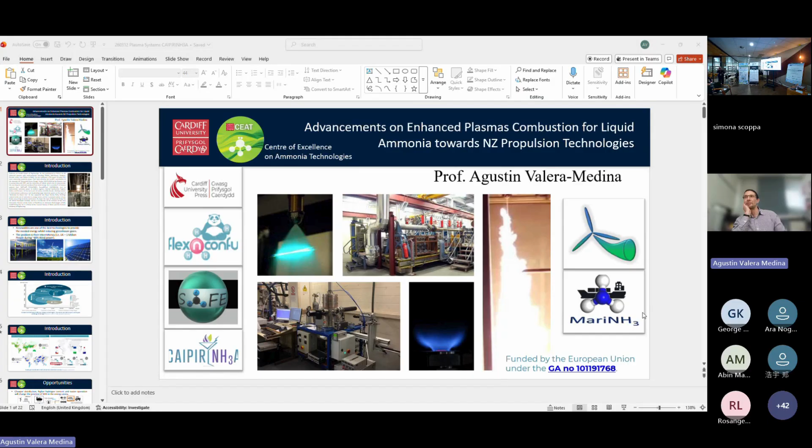Excellent. Okay, so again, thrilled to see that there have been lots of questions about what we have been doing, and I can expand on many of the points raised by Konstantinos, particularly on the technicalities of using combustion. So this is a program called Caipirinha, as mentioned by him, funded by the European Union. The whole rationale behind it is that we can use ammonia directly for many different applications.

So this is just a brief introduction for those that like reading - this is some of my CV. But the reason for it is, if you don't like it, you can still listen to the story on how we came across the use of ammonia.

This goes back 14 years ago when one day before Christmas, Siemens showed up and said, we want to burn ammonia. We didn't understand what they wanted at the time, and I decided to take the challenge. Why not? I wanted to find something new, so I gave it a go with ammonia.

We thought at the beginning it was just a simple project, but eventually we found out there were many things going on, particularly in Japan, where things were happening at industrial scale. People were doing very interesting research, and eventually we managed to get on the train and develop many different applications.

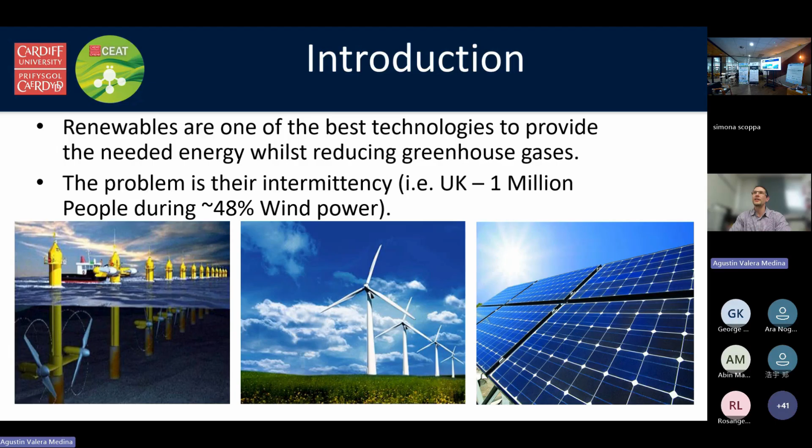In the case of ammonia, for example, it's been around 100 years that we have been using it for fertilizing applications, since the beginning of last century when it became industrialized, eventually boosting a third of the population worldwide. That's one of the main reasons why ammonia presents a very interesting case when it comes to certain applications.

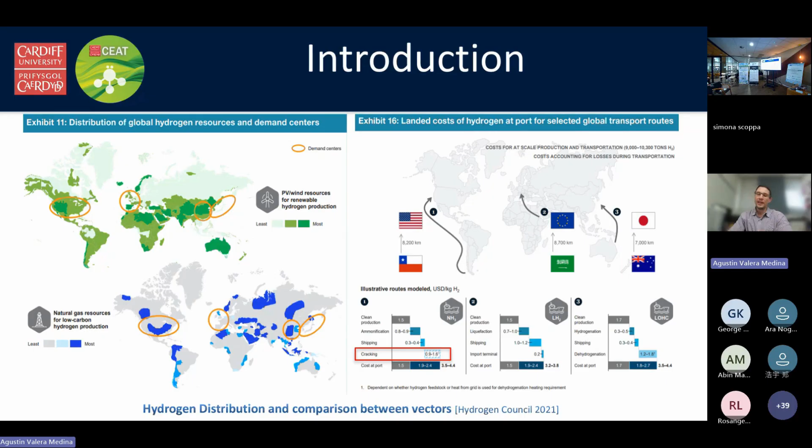Therefore, this raises the question: can we burn ammonia efficiently and directly into combustion systems? This is work we've been doing in collaboration with many other universities—Newcastle, Nottingham, Bath—to evaluate where we see this ammonia stream going.

We know there will be many scenarios where hydrogen will be king. For example, when talking about city deployments, small and short distance distribution, and immediate utilization, hydrogen will rule out over other molecules.

However, when it comes to long distance, and going back to isolated locations, we see ammonia as the best option. That comes as marine propulsion potentially—as I'll raise now in one of the questions brought up to the chat—and obviously rural applications in disconnected locations.

For example, here in the UK and spread across Europe, there are many farms or small communities that still rely on propane or other chemicals because connectivity via electric grids or gas networks is impossible. It's simply too expensive, so they've relied on these fuels for decades, and that's not going to change in the short term.

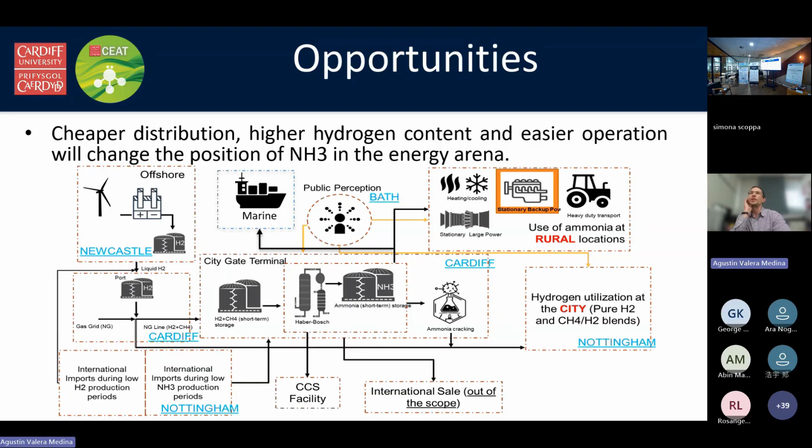So making ammonia for these particular situations is a very good option. One of the big problems we face is how to burn ammonia, and we have different alternatives.

Among all the different molecules here, ammonia's ignition energy is a few hundred times higher than hydrogen's. Similarly, its laminar burning velocity is a few hundred times lower than hydrogen's, making it very difficult to burn when it comes to direct injection.

So either you go with a doping agent like hydrogen, obtained via partial cracking of the ammonia, or you mix it with natural gas, providing a transition from natural gas systems, propane, as I'll show you later, or even other alcohols or fossil-based liquids like gasoline or diesel.

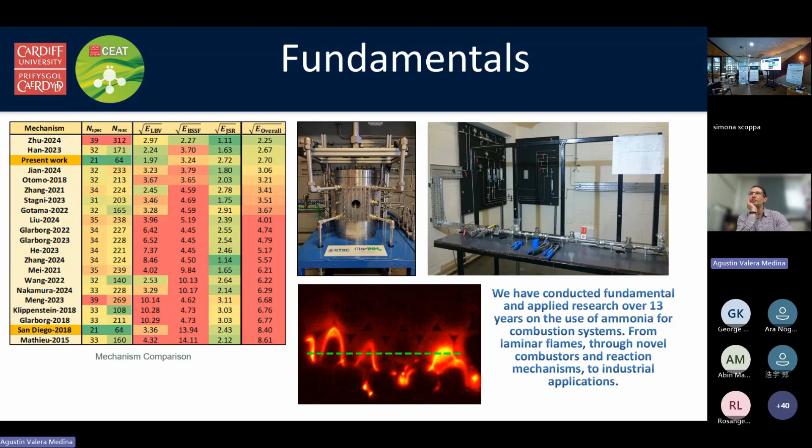Well, a few years ago, around 2017-2018, there were a few documents where universities in Germany started looking into the use of plasmas for the combustion of hydrogen. And it was interesting because, going back to Konstantinos's point, one of the things plasmas tend to do is create radicals. So if you have these radicals ready to react, once you get to the burning zone, they start mixing with the oxygen immediately, reducing the reaction time. Similarly, they produce radicals that are more strategic in recombining with oxygen to produce the final molecule—in this case water when analyzing hydrogen—instead of producing nitrogen oxides. That spurred imagination and eventually led some groups at Georgia Tech in the US to characterize the first ammonia plasma system.

It was very interesting because once they started using it, they found that stability improved, the flame got better, and the emissions profiles in terms of nitrogen oxides from ammonia combustion went down drastically.

As part of that program, we started working with our partners in Birmingham and Oxford, delivering some analysis via numerical modeling. One of the things we found was that depending on the amount of energy put into the plasma, and the concentration between the air and fuel mixture, that profile would change drastically. So there were many questions still to be answered, and we decided to carry on with our program.

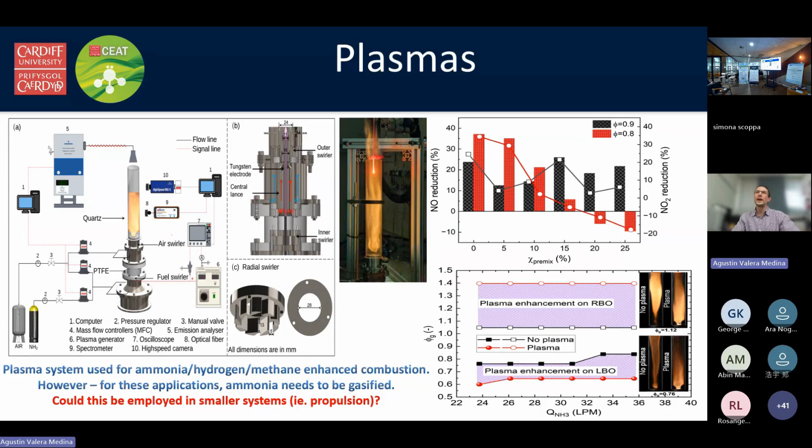So we decided to join Konstantinos's proposal and thought, okay, this looks very good, let's give it a go. But then one of the big questions was: okay, we can bring plasmas—people have already done it with gaseous injection—but what would happen if we decide to go with liquid, to prepare it as one of those concepts for marine and aerospace applications?

As part of that, some of the ongoing studies we included analyze what happens when ammonia is injected, and depending on that pressure—going back to the pressure—if the pressure in the atmosphere you're injecting into is not high enough, you might have flashing conditions. So you have a spray that eventually vaporizes, but because it's cold enough and reaches a balance point between liquid and vapor, it will start producing liquid again.

So you end up with liquid droplets in such a system. Whereas in cases where you have higher pressures in your atmosphere, you reach only spray atomization, as you would in any other liquid application. So at lower pressure, that causes a lot of problems that we wanted to exploit to give us something new and interesting.

So from that, we jumped on the program and decided to use a system that at lower atmospheric pressures will produce, from a high pressurized system around 20-25 bar injection, a mist that is produced first in atomized liquid form, then vaporizes partially, and eventually parts of that convert back into droplets or very small droplets for the system to take in.

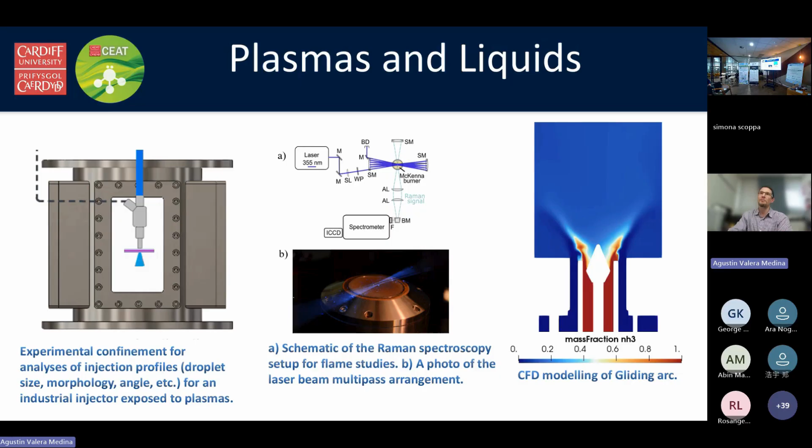So with that, we got a system that looks like this - laws of health and safety aside, I'll show you the next slide, because we are bringing now liquid plus plasma high voltage systems into the lab, all pressurized at, as I said, 20 bar pressure delivery system. So with that, we are measuring voltage, current, and pressure, so we are able to define what energy we got from the plasma.

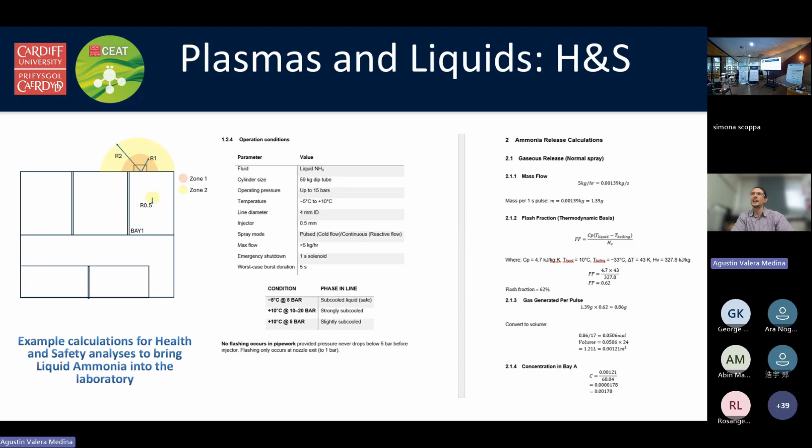And one of the things I mentioned is all this health and safety work. This is just an example of a 20-page long analysis we had to do to be compliant with laboratory requirements, where we had to analyze the flash fraction we might generate in case of a leak from the liquid injection system, Hazop, ATEX rating, etc. That has been extenuating, but now we're at the stage where we've got everything ready and the system ready to start running.

NH2 star, OH star, and you can see as well the stability increases - the map enhancements, the orange zone on top of the gray one, show how we have improved operability of the system. And thanks to all these measurements we are doing, we can estimate that for this particular system using gaseous ammonia, we are actually using around 3% of the flame power output we're generating, which is essentially nothing. We initially thought it was going to be massive because of the amount of high voltage required, but it's actually the other way around.

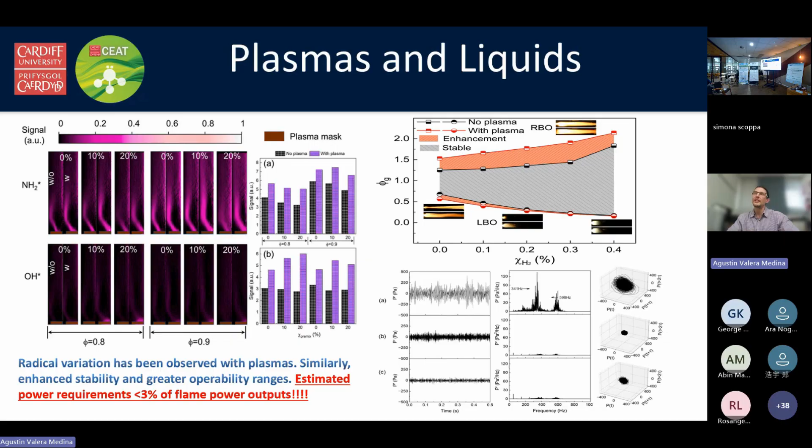It's a very low amount of energy that we're requiring because of these high repetition, high intensive plasmas that we are generating in a very thin two-layer layout. So with that, just mentioning some other projects and how we're moving into these for more practical applications, looking into the future.

We are already working on an engine, a boiler system that is going to deliver around 1 megawatt power. It's already been tested at 0.5 megawatt and is already generating steam that I'll show you here in this video. This was taken just a week ago, and this is the kind of system where we can then implement all these PLAS-Mi NH3 concepts.

Right now we're bringing the ammonia gaseous, but the idea is to as well evaluate its use via plasmas and direct injection to then provide for that power that we are generating. So these are some of the applications where we see future.

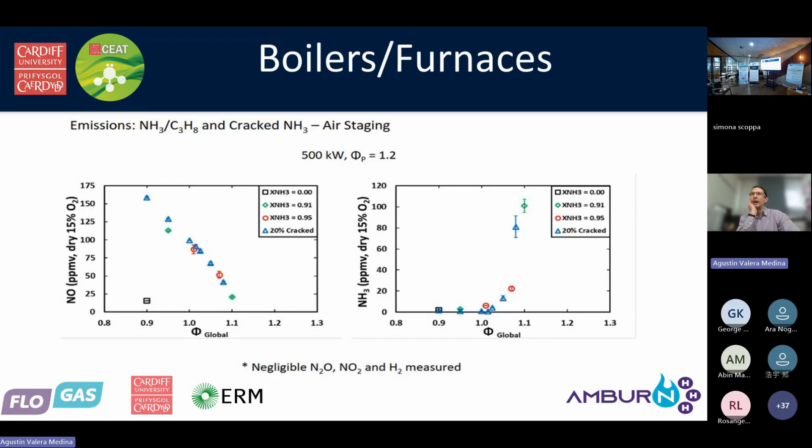Some of the systems that we are using via this way, on the design of swirl combustors, are allowing us to produce power at that scale, 0.5 megawatt and almost a megawatt, with negligible N2O, NO2, and hydrogen measurements, with almost 25 or 50 parts per million of unburnt ammonia and nitrogen oxides, which is again very good, super low emissions. So with that, I'd like to conclude.

These are some of the applications where we see loads of potential: power generation, aerospace, again being PLAS-Mi NH3, that concept that we are trying to bring to this field, power generation at larger scale similar to what Mitsubishi is doing, liquid formation, and some other aspects of the recovery of ammonia from marine systems.

Collaborations that we have ongoing, lots of work with different universities, so anyone interested, please let us know. We're always happy to collaborate and work with partners across Europe and the world. And these are some of the things that we have created: a journal on the subject, a few books.

If you're interested in presenting all this fascinating information that you've been sharing, we have a symposium in Chile in September that will cover every aspect of ammonia energy, from production to storage, distribution, and utilization of the concept. So with that, just to conclude, ammonia can be used to store energy for long distance and long periods of time.

The low reactivity requires additional methods for combustion improvement, such as plasma, which can be a great solution for mobile applications. In this case, we're thinking again of internal combustion engines, and as I've said, propulsion systems for aerospace.

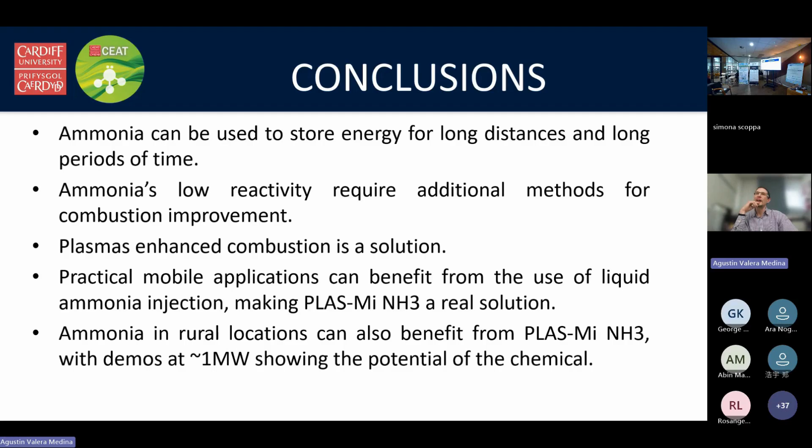Finally, ammonia in rural locations, we believe is where we have great potential, because people in those areas are used to fertilizers, used to ammonia, and as long as we have the right regulations—since it's highly toxic, which can be a problem for health and safety—these communities are the way to move on a commercial solution.

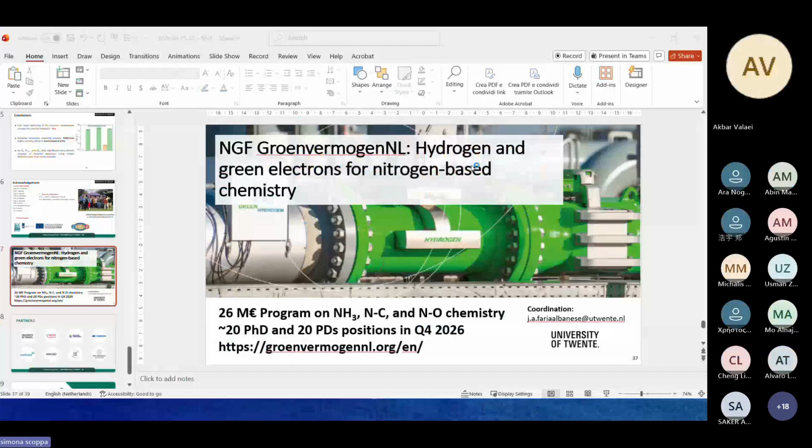I think we have to restart. Some people are still taking coffees. They are already connected online. You don't hear? Can you hear online? Yes. Yes, they can. Okay, thank you very much.

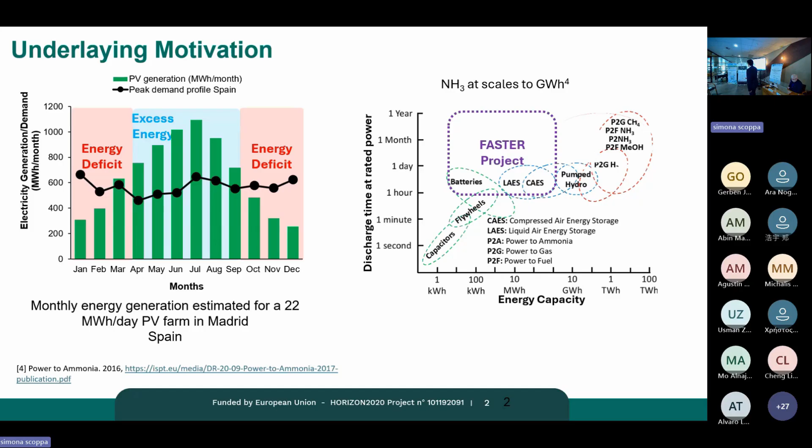When you look at the different possibilities, this is the same plot that Agustin was showing, but in a slightly different format. You see chemical energy vectors are one of those materials that have sufficiently large energy capacity, installed capacity for production, and you can also make it and transport it for periods of weeks and months. In the case of the Faster project, we are aiming not necessarily at gigawatt scale, but as I said before, at decentralized production - megawatt scale generation of ammonia storage, then usage for later energy generation.

The concept behind this activity stems from a lot of work we have done in the group, trying to understand how we could use ammonia as seasonal energy storage to buffer peaks of energy production. We studied this primarily for remote locations - islands, remote locations in South Africa. We're also currently studying the case of Morocco, where you can think of using renewables to generate water and energy for a community, but also use it as fertilizer. So ammonia serves as a kind of water-energy-food nexus in this approach. You generate the ammonia during the peak season of energy generation, and utilize it when you don't have it - that's the underlying idea.

After many years working on this, we finally got the Faster project funded, which tries to leverage this concept. The idea is essentially to reduce the levelized cost of your energy using ammonia as an energy carrier.

Now, as mentioned by Fausto, I'm a catalysis person - I like to understand things starting from the conversion step. When you look at synthesis versus decomposition, something strikes you immediately, as already mentioned by Faria many years ago: the catalyst that is very active for the synthesis of ammonia cannot do the ammonia decomposition. So you cannot apply the microreversibility principle to use the same material for both steps - you actually need two different materials for that. This has to do with the Bronsted-Evans-Polanyi relationship: catalysts that interact very strongly on one side of the table will not do so well on the other side.

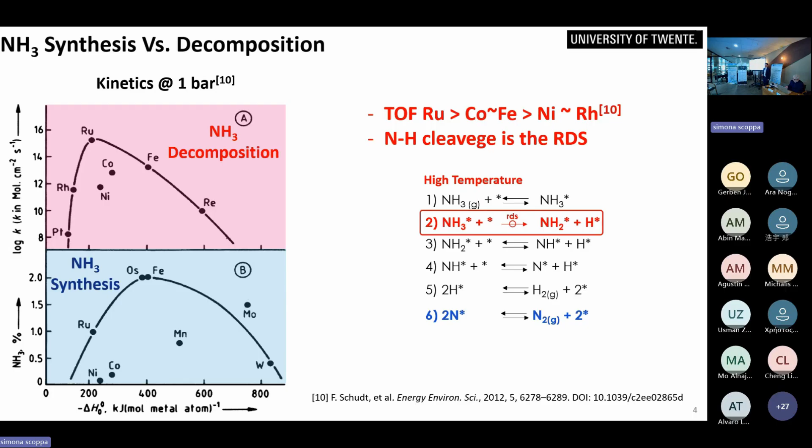For today, we're going to be looking at two steps. One is the ammonia synthesis, where the rate limiting step is the dissociation of nitrogen. The second part of the talk will be about how we can do ammonia cracking. We're going to be looking at how to activate nitrogen-nitrogen bonds and how to activate nitrogen-hydrogen bonds.

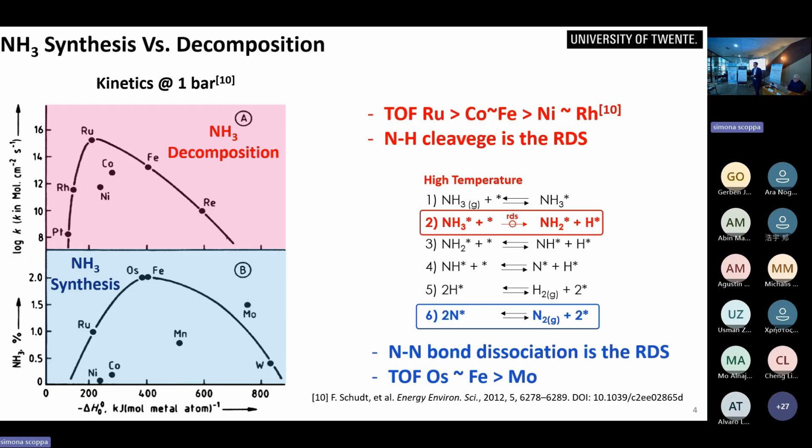I hope my talk is not too technical. But the main idea for the project phase is how we can make it flexible, how we can downscale it to megawatt sizes.

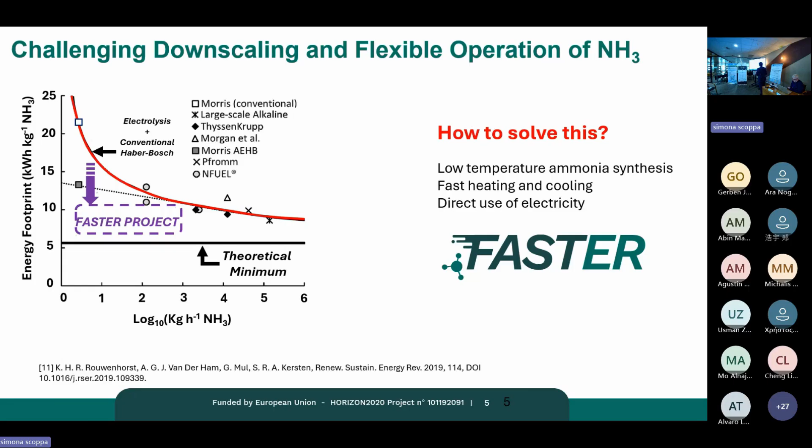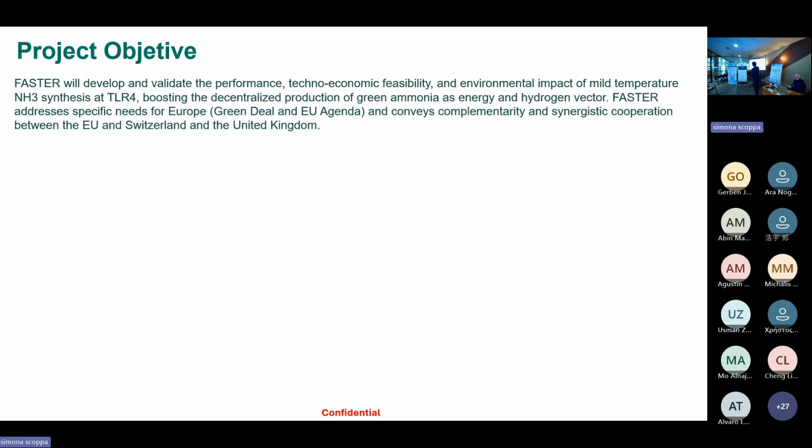The FASTER project is all about ammonia synthesis, which I'll discuss in the first part of the lecture. The underlying project objective is to develop a flexible platform that can convert ammonia. The target here is TRL4. As I said earlier, we try to address societal and technical challenges for low-cost seasonal energy storage solutions. That's the main underlying target.

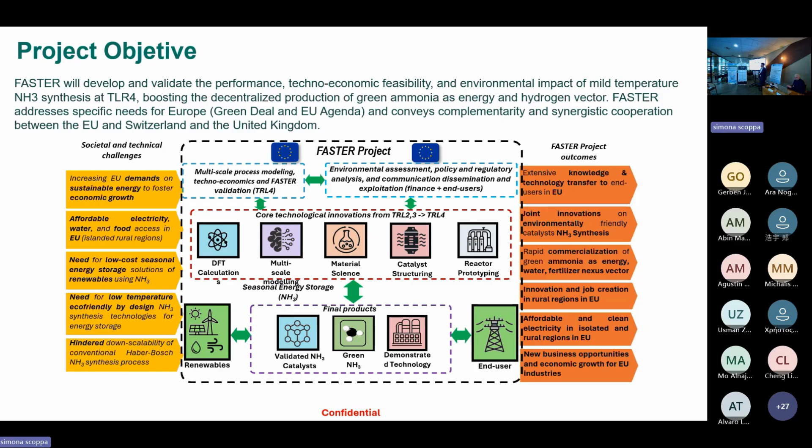The idea eventually is to have a platform combining this water-energy-food nexus, deployable in rural areas or islands and so on. For that, we have a number of components built towards these targets, ranging from fundamental DFT calculations of which materials can do these types of reactions, to the reactor and catalyst structuring. These are the sort of technological innovations we bring in.

At the end of the pipeline, we have a company, WinGD, that used to be Wärtsilä, but has now changed its name for some of the things they do. They are the manufacturers of these two-stroke engines and so on for ammonia-to-power units.

I'm going to briefly talk about these few key innovations. The first one starts with the making of the catalyst. This cartoon illustrates what's called, in this case, a metal nitride containing a metal cluster. The idea is that you try to leverage what's called a Mars-van Krevelen process, where hydrogen starts to dissociate on the metal side and reacts with nitrogen on the metal nitride at the interface, generating a vacancy.

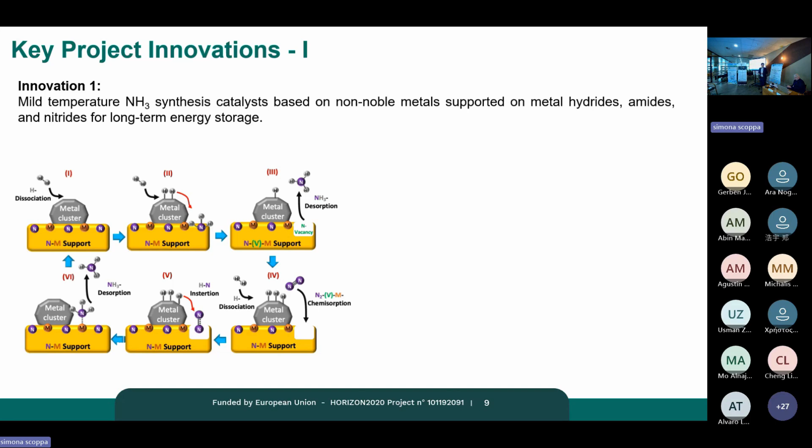By evolving ammonia, once you have that vacancy, it's a strongly nucleophilic species, so it can actually attack the nitrogen, and in that way you form a regeneration of the metal nitride, closing the chemical loop. This cycle has been demonstrated by the group of Hosono in Japan, where they have shown conversion at very mild temperatures and pressures.

The general idea is that this vacancy, when formed, injects electron density into the metal, and that changes the filling of the D states on the metal surface, which makes it very reactive.

Now, one of the limitations in this picture is the metal nitrides. In this particular case, things like cerium-lanthanum nitrides are extremely sensitive to oxygen, and will essentially not be scalable. So the objective of the FASTER project is to move away from metal nitrides and use mixtures of materials, such as metal oxynitrides, which can allow us to operate these catalysts in the presence of water and ppm levels of oxygen, and so on and so forth.

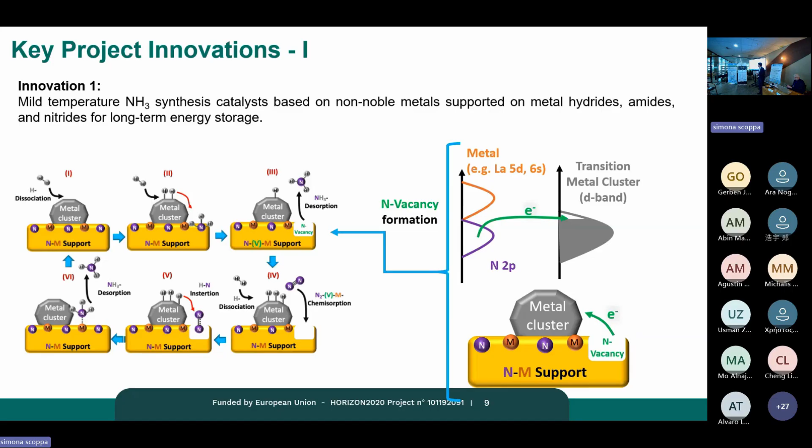That's a very, very important innovation. We have a few results on this as well later on.

The third innovation, the last one, is all about high fidelity modeling of this process if you are going into dynamic operation. With that, at the University of Twente, we're going to be working on bringing physics-based multi-scale modeling of the kinetics that we get in our labs, and then couple that with heat and mass transport models, and eventually with the Aspen process modeling, so that we can get techno-economic assessment and also help our colleagues with the life cycle assessment.

This is very important because we have to have this in dynamic, and modeling these processes dynamically is not trivial. Creating just steady state operation models is not enough. We have to be able to model the dynamics. For that, we need data from the pilot system. So these are the three key innovations we are working on in the FASTER project.

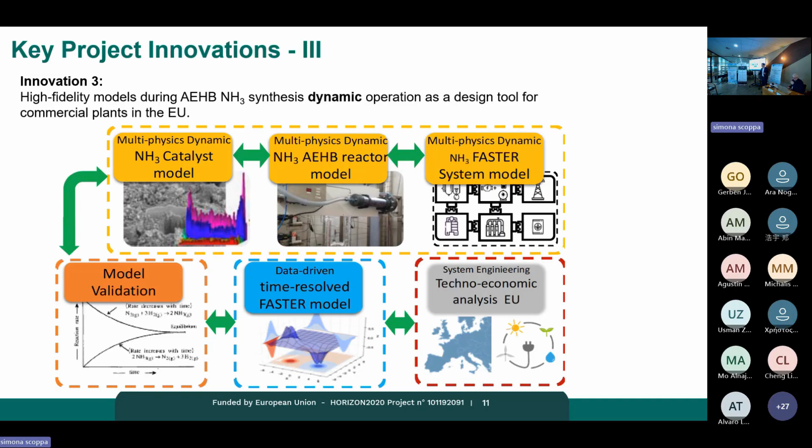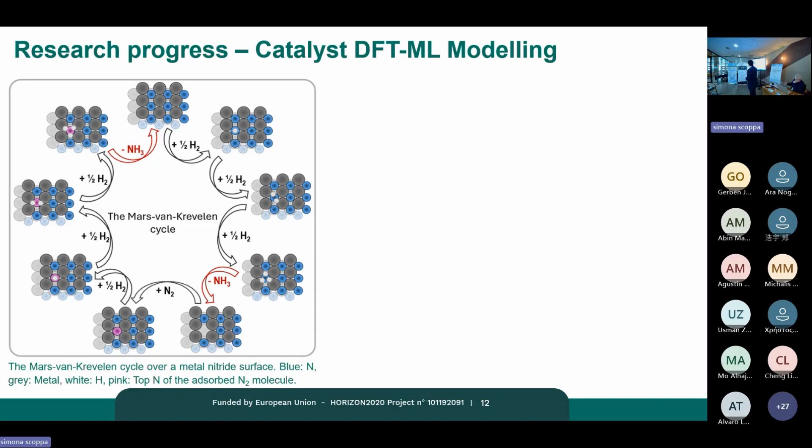So we started with our colleagues in Cardiff. They look at different materials, essentially trying to understand the energetics for nitrogen vacancy formation on different metal nitrides. As of December, they have explored more than 140 different surfaces. So this is really screening the periodic table to a great extent.

Right now, they have calculated these oxygen, nitrogen vacancy formations for more than 70 of these 140 values. So they have now created a library. They feed that information to us, and we go to the lab and start making materials.

In this case, this ammonia is from nitrogen oxygen vacancies that are being generated by hydrogen, even though you don't have a hydrogen dissociation function here. That's a very, very interesting point.

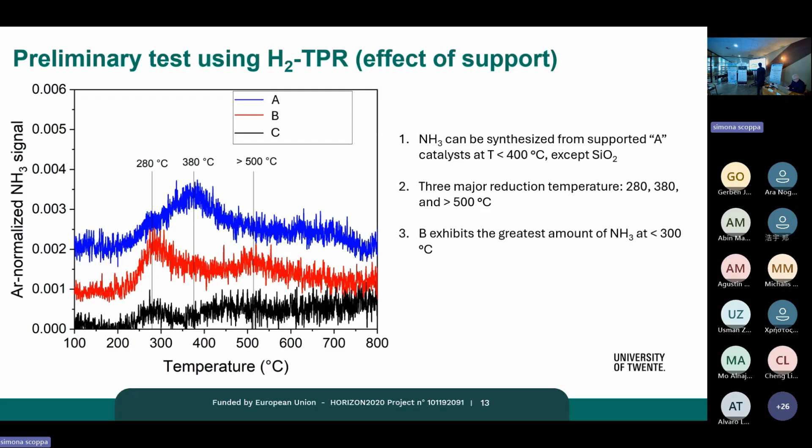Now, if you add a metal functionality, which I also cannot tell you exactly which metal it is or anything about its size, I'm sorry about that, you can actually activate a much larger fraction of your metal nitride and evolve a greater amount of ammonia. The temperatures also shift towards slightly lower values.

We have actually newer materials that I'm not showing you today that show an even larger concentration of ammonia evolution. Now, if you take that data, generally speaking you have three different types of temperatures, and the region we're interested in is temperatures that go all the way to maybe 300 degrees C at most.

So we're interested in this plot, and you see that we now have a formulation that is very promising for such an operation window - at 280 degrees C and about 50 bars of pressure, which is the idea we have for this.

We have time, okay good. So as you can see, during this first year of the project, we have been very busy trying to create materials that can do this job, and we have some very good leads at the moment.

Now the next period is going to be about doing the full kinetics, because this is just a temperature program reduction experiment. So we have to test this under reaction conditions and see what the turnover frequency of these materials is, and benchmark them against conventional ruthenium-based catalysts and also iron-based catalysts.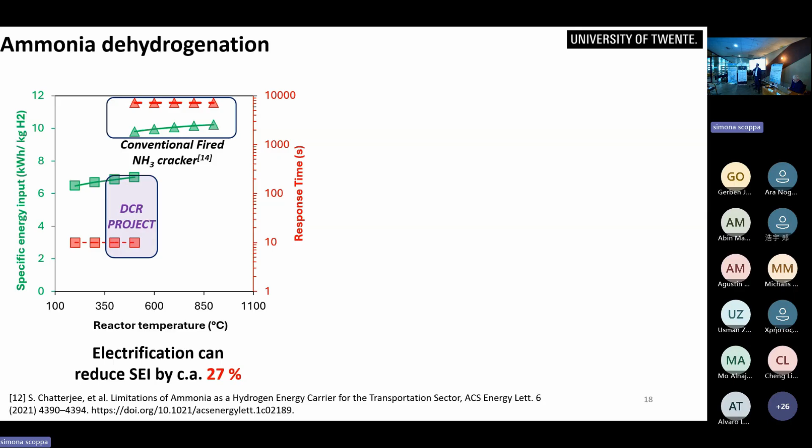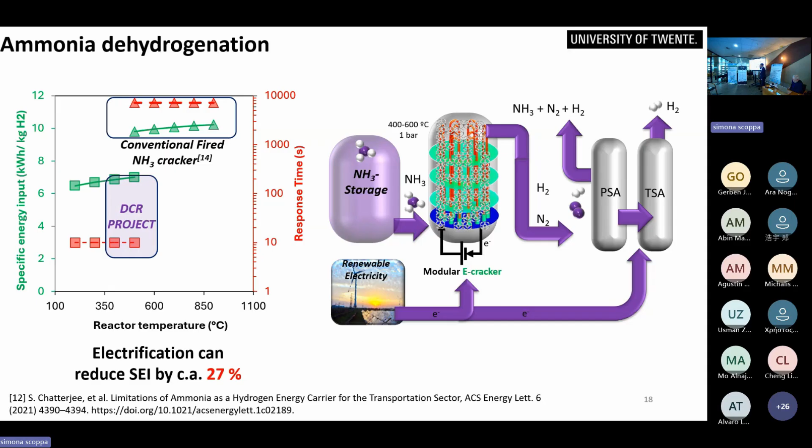So these are not my estimations, this is just from that paper you see. And the beauty of it is that if you couple this to electrical heating, you can go from dynamic operations that take maybe hours to days, to maybe seconds. The general concept is that you have a Joule-heated system where you're overcoming the endothermicity of the reaction by providing heat with an electrical source, and then you couple that to whatever absorption or pressure swing adsorption system you'd like to use.

But how exactly? So the general objective of this project was to do this sort of feasibility study, a proof of concept. With that, we wanted something that was dynamic—on and off, electrically driven, compact, and selective—and that could be stable over time.

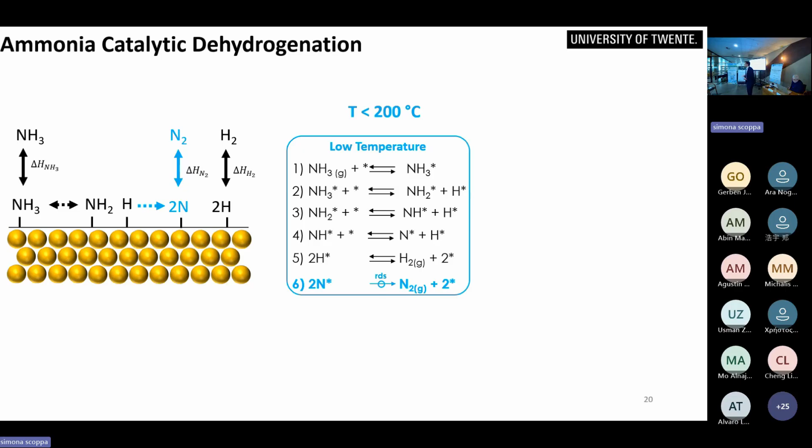Now, to develop this, we have to go to the basics. If you look at the reaction scheme of ammonia cracking, the first thing that happens is ammonia adsorption. It's well known that nitrogen-hydrogen bond dissociation is the rate limiting step at high temperatures. But if you're working at low temperatures, then nitrogen-nitrogen bond recombination is the rate limiting step—essentially the surface is covered by nitrogen, and you are nitrogen inhibited, not poisoned, as was mentioned earlier. At high temperatures, it's actually the nitrogen-hydrogen bond dissociation.

So the underlying question for this project was: can we actually go back and forth between these two rate limiting steps in such a way that we can enhance the overall reaction rate? This isn't a concept I invented—it's actually something well known in the catalysis community for many years, but more recently has been brought back to life at the University of Minnesota, these dynamic or oscillation frequencies for catalytic conversion.

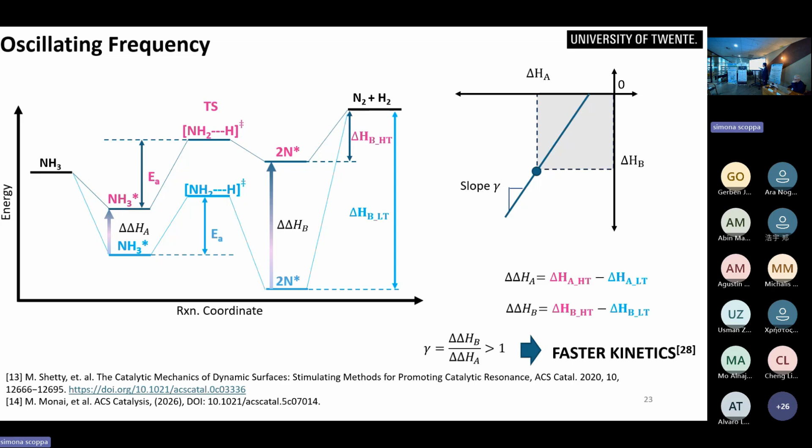So you can bring in the ammonia, break it, form the nitrogen species, and then desorb that—almost like a concerto type of process, where molecules go from one state to the other. That only happens when you reach that optimal oscillation frequency, explained by this cartoon about the changes in delta H. So we used that concept and thought: how can we oscillate from one state to another in a very, very fast way?

So for that, we came up with this design, where we have essentially two electrical leads that are in contact with this material underneath. This is a reaction chamber where the gases come in from one side of the reactor and then exit. Inside this volume, we have a graphitic material where heat is generated by flowing a current. At the surface of this graphitic material, we have a nickel catalyst that activates the ammonia.

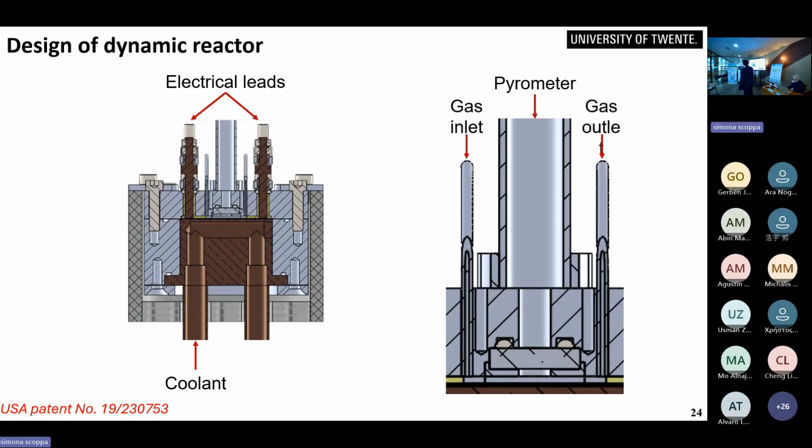This reactor design helps provide heat very, very fast. We can look at the temperature locally at the surface of the catalyst using a pyrometer, in the order of fractions of hundreds of milliseconds.

The reactor looks like this. As you see in the picture, we have a window to see through with the pyro probe. Here is the reaction chamber with the two inlets. This is the face of this side of the reactor, and this is the bottom part where we have a refrigerating coolant, just to ensure we can do dynamic operation.

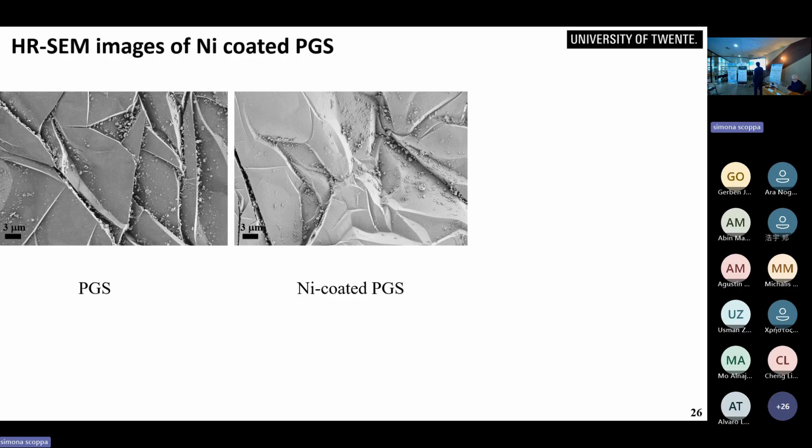Now, the surface of the graphitic material we use as a heater is based on pyrolytic graphite sheets. This is how it looks after the nickel coating. The nickel coating is very thin, only about 50 nanometers. This nickel coating is not an optimum catalyst, but it's just sufficiently active to break ammonia.

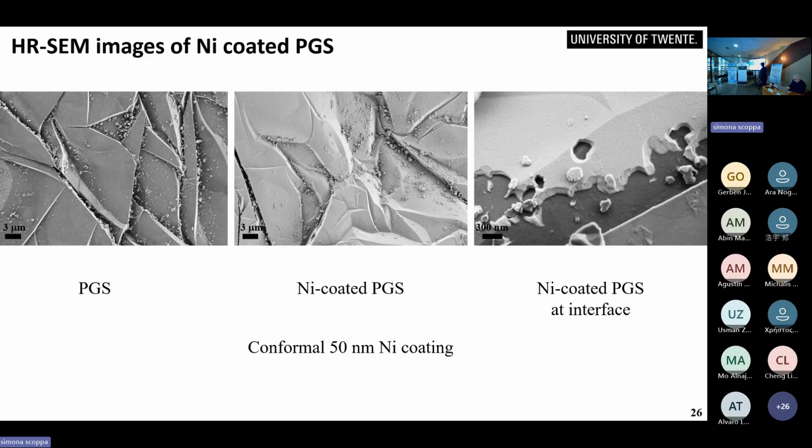We know from the catalysis point of view, the best or optimum size is about 2 to 3 nanometers, where you have these B5 sites that activate the ammonia very easily. So this is by far not the best catalyst ever. Let's keep that in mind.

So this is how this process works. We provide electrical pulses that are very short and very large, sufficiently large to reach, in 8 milliseconds, a jump from 200 to 800 degrees C, that's 75,000 degrees C per second. We cool down at a rate of 1,500 degrees C per second, which takes about 400 milliseconds to cool back to 200 degrees C. Then we calculate the integral average temperature of this system, and that's about 300 degrees C. This is a very important detail to keep in mind.

So we start running this at 1 Hertz, sending a pulse every second, and look with a mass spec at what happens with the ammonia. When the system is off, nothing happens - there's no ammonia breakup, no hydrogen. The moment we turn it on, all of a sudden you see ammonia conversion. We get about 5% conversion at 293 degrees C.

You might wonder what exactly this means in the context of ammonia cracking. Well, we can calculate a turnover frequency assuming the geometrical area of nickel available for this reaction, and based on that, estimate the turnover frequencies.

To benchmark these results, we have a separate plug flow reactor where we tested nickel-based catalysts on alumina. These are the typical turnover frequencies we get, which are actually in line with a lot of the literature - you get values around 0.06 seconds to the -1 at 500 degrees C.

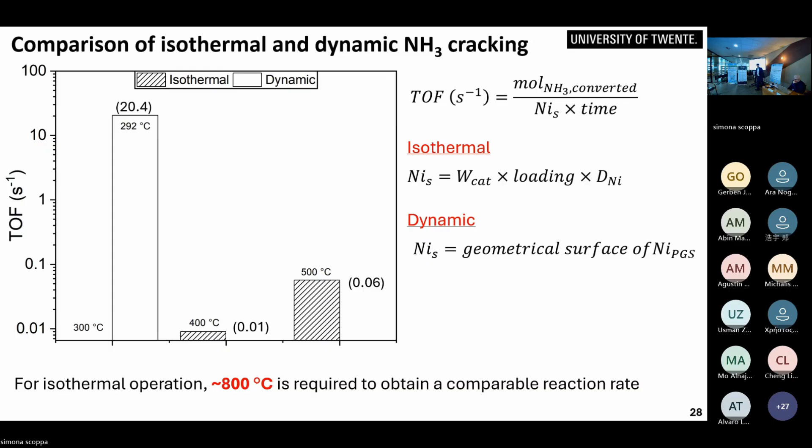A fundamental question is how this responds to changes in frequency and temperature. Maybe I don't have time to go through all of this, but one thing we can do is vary the frequency at which we send the pulses. The consequence is that the total average temperature actually goes up, because now you don't have enough time to cool off the system before the next pulse comes in. We can also see the effect of the amplitude and the average temperature on our kinetics. In principle, you'd expect that the higher the temperature, the better the performance - that's the general rule.

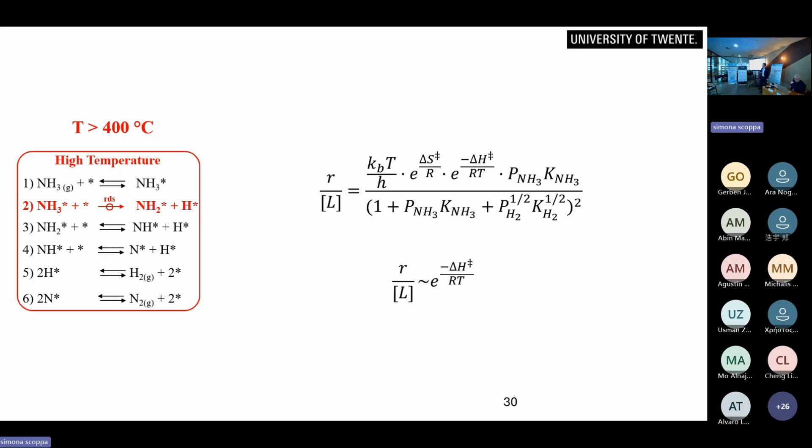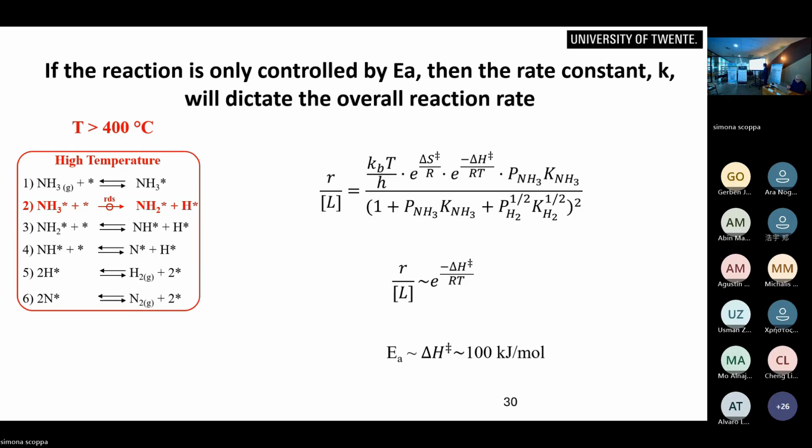If that was the case, then using transition state treatments, the reaction rate expression for this process boils down to this rate equation, assuming reversibility is not such an issue. This term is essentially your Arrhenius equation, which should increase the higher the temperature goes. If that's true, the reaction is controlled exclusively by how high I go in the peak, so I can assume this is a typical activation barrier and see what the value of that exponential term is.

This is essentially my kinetic constant as a function of the different frequencies I use. Generally speaking, this number starts to go up as you go to higher and higher temperatures, so the calculated rate should go higher and higher as I go to these higher average temperatures.

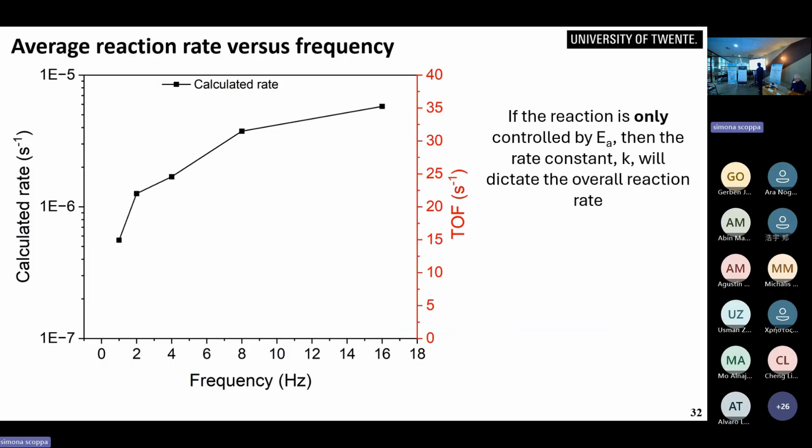But in reality, when we calculate the turnover frequency that we measure experimentally, we see a very different picture. The turnover frequency actually decreases as you go to faster frequencies. That's a very counterintuitive effect - you don't expect that the rate will decrease with an increase in temperature.

This means there might be something else playing against us during this process. What you see is that there is an optimal frequency at which this process is enhanced to the maximum - that's when you reach this very high rate, now 35 seconds to the -1.

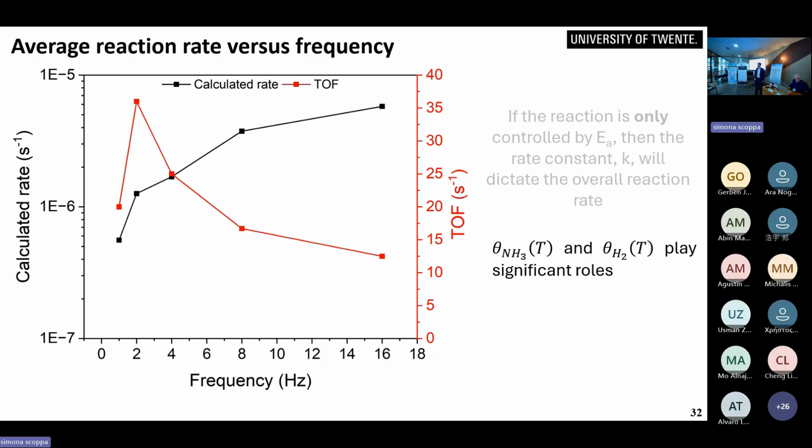For that, we had to do quite a few kinetic experiments. Generally speaking, if you look at the apparent reaction order on ammonia, the lower the temperature of the maxima we apply, the lower the order. That would suggest saturation kinetics, which makes sense - lower temperature, things stick longer on the surface; higher temperature, things do not stick so well.

But the intriguing one is hydrogen, because that gives the opposite result - there is more inhibition at higher temperature. This suggests that when you go to higher temperatures, you're trying to get rid of the hydrogen on the surface, which helps accelerate the reaction kinetics at the higher peaks during this pulsation process. That would otherwise be very counterintuitive in an isothermal process.

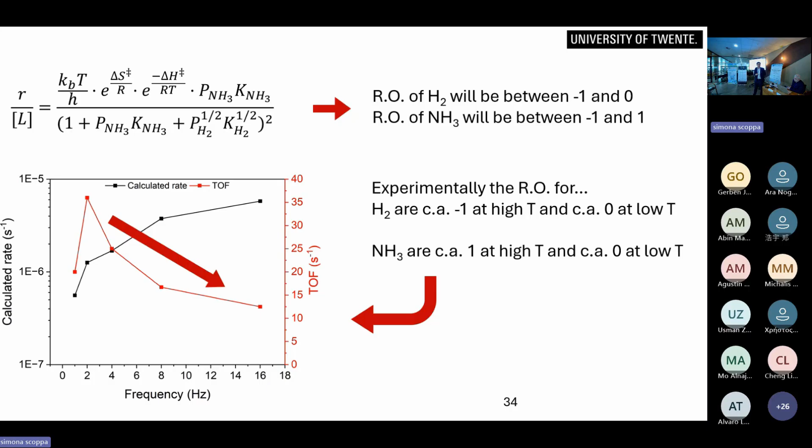So the conclusion from this is that this maxima is linked to surface coverage fluctuations during these peak temperature swings, rather than just Arrhenius effects.

In conclusion from this second part, the message I want you to take home is that we can achieve very high reaction rates with this rapid switching. There seems to be a 1,000-fold increase in activity when we are at this kind of sweet spot of 2 Hertz. We still don't know exactly why that is - we think it has to do with surface coverage, and we're doing more calculations to prove that.

So that's related to this, and that's the conclusion - this is something we're really looking forward to seeing how much further we can take it.

Before I let you go, I wanted to do a bit of promotion for the postdocs or PhD candidates who might be in the audience. I'm the project coordinator of this national program on hydrogen and green electrons for nitrogen-based chemistry. We're looking at nitrogen-hydrogen, nitrogen-carbon, nitrogen-oxygen bond chemistry, and we're going to have something like 20 PhD and 20 postdoc positions across the Netherlands. If you're interested in knowing more, please let me know.

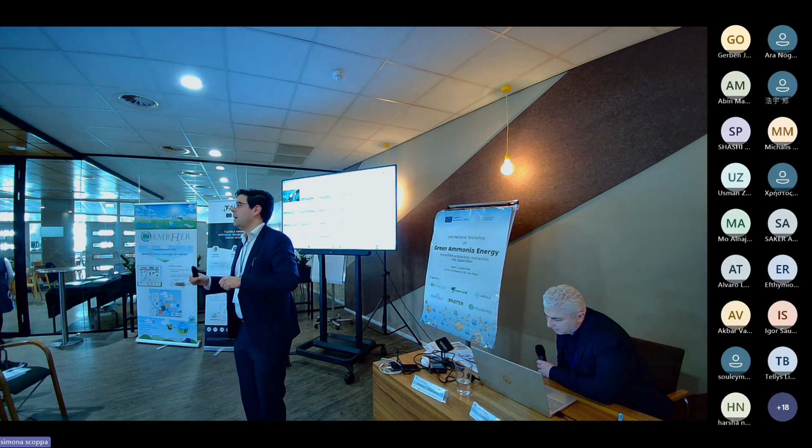The data I'm showing you, we honestly don't know yet. I don't dare to tell you it's one or the other at this moment because we don't know.

But we're not the only ones who have thought of coming up with ways to stabilize these metal nitrides. There's actually a very recent paper in Angewandte Chemie from Hosono's group where they also exposed it to water and did all sorts of dirty tricks to see if the catalyst was dead, and they showed it's still active. It is because you put something with oxygen resistance on it—they dope it with aluminium in that case to make it more stable.

So in short, you can have either one of the two. To be conservative, I don't dare to tell you exactly what's working so well with ours, but hopefully when the PhD students publish their work, we will disseminate the results.

There is a question online for you: if you are using pure ammonia, how do you measure the order for the other gases, hydrogen for example? For ammonia cracking, we feed ammonia into argon, with the concentration of ammonia at 10% in argon.

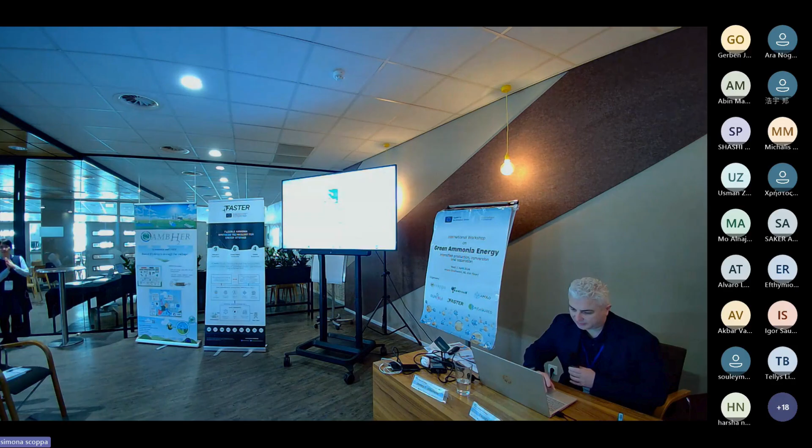Was it a PDF? No. I see it. Share the screen.

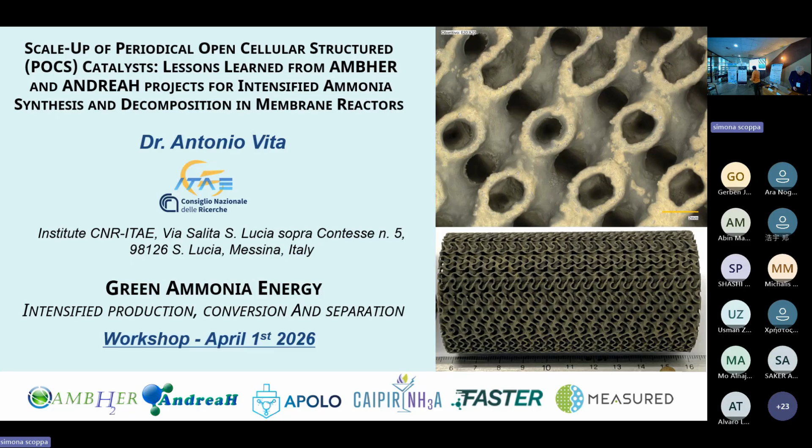The promise of green ammonia as a carbon-free energy carrier for a sustainable future - many things have already been said about this. I can add nothing more, but I would like to focus on some drawbacks.

Especially when we think about producing green ammonia from renewable energy sources, we have to think about downsizing the complete system, and eliminating entirely this large steam reformer plant integrated with a Haber-Bosch system that feeds hydrogen, nitrogen, and heat, integrating heat for efficiency in large scale production of ammonia, eliminating this with an electrolysis system.

Maybe we have some problems related in principle to cost, capex, but also energy demand - the overall energy demand for the global system could be another problem.

I absolutely agree with Jim, we have the same picture. When we downsize Haber-Bosch processes, we probably meet some problems related to energy consumption. Energy consumption increases because there is not much heat that comes from a conventional steam reforming plant.

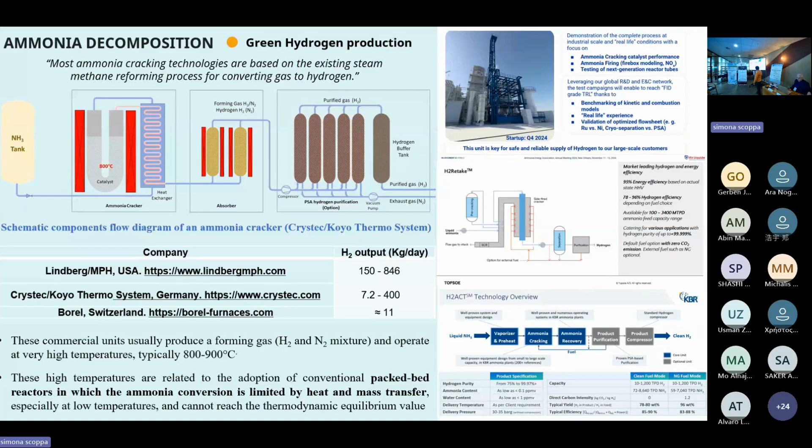So also in this case, process intensification is a way to reduce temperature, reduce pressure, and realize a more efficient process. That's why there are many European and international projects that go in that direction.

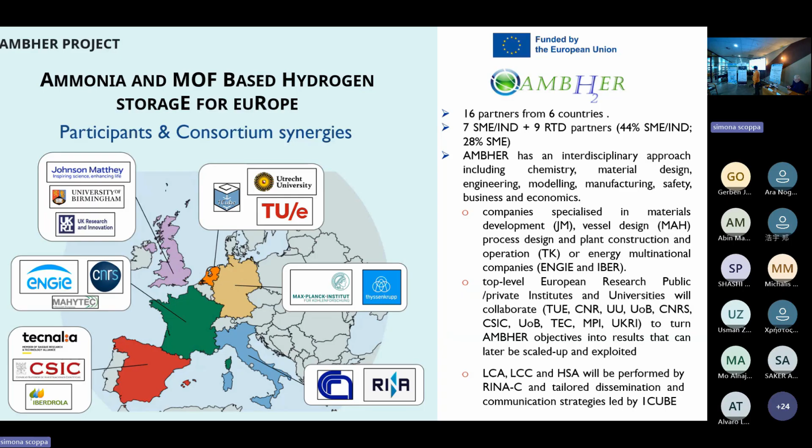It's not our coordinator - our research team is involved in this project to develop structured catalysts, specifically gyroid-based. They extract some structured supports, 3D printed, that should be integrated with ammonia, with membrane, carbon-based membrane.

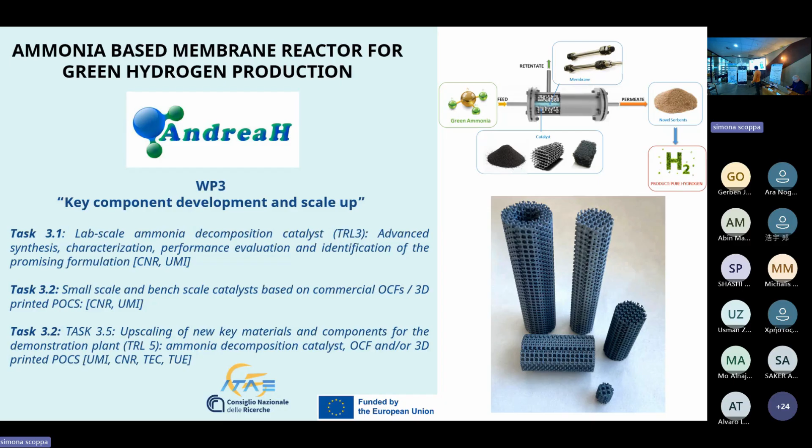And in another project, we have a similar concept for hydrogen production from ammonia decomposition. Also in this case, we are involved in developing structured catalysts, 3D printed baskets and catalyst to improve heat and mass transfer, to work at low temperature. In case of ammonia synthesis, to work also at low pressure.

So this presentation is a summary of the activity of our teams, carried out to develop this kind of structured catalyst.

When we talk about structured catalysts, more or less these are all the steps involved in the preparation of this kind of structure: the POCS, periodic open cellular structure, catalyst synthesis, support manufacturing, and all the steps - substrate pretreatment, slurry preparation, coating, and so on. These are all the steps involved in preparation of the structured catalyst.

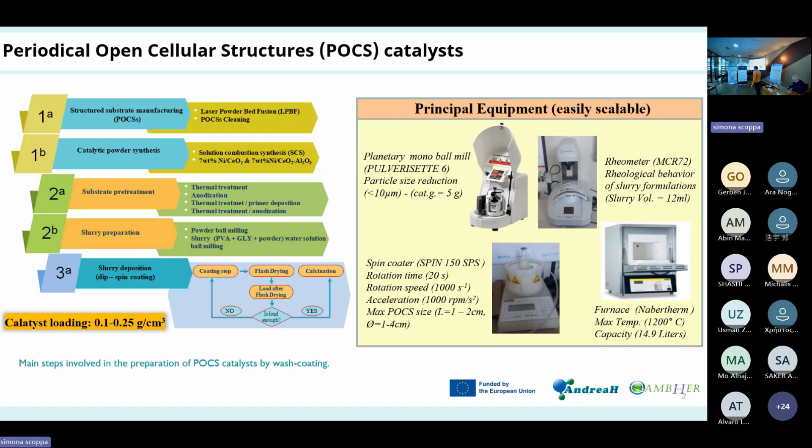On the right, you can see the principal equipment we used during this activity and the project. We used planetary ball milling to reduce the size of the powder, we did rheological studies on slurry preparation, and we used a spin coater for the distribution of slurry on this catalyst.

Everything starts with the design of this structure using the software. Then the other step is printing using powder, metal powder, and printing.

Additive manufacturing in general gives us the possibility to work with different materials, depending on the process, depending if you need specific conductivity, thermal conductivity of materials, depending on the temperature of application. So we can print nickel-based, copper-based, aluminum-based materials easily.

In different forms, in different geometry, with the design and with additive manufacturing we have the possibility to manage virtually everything: manage the dimension of the cell, the unit cell, the sheet size. We can decide also the porosity of materials. We can manage also the surface area, the specific surface area, in order to

print with the desired material, the desired support that we need, but with that specific process, that specific catalyst also. What we manage is the cell size, the pore size, regulating the dimension of the pore, the sheet size that regulates the thickness of the wall of the structure.

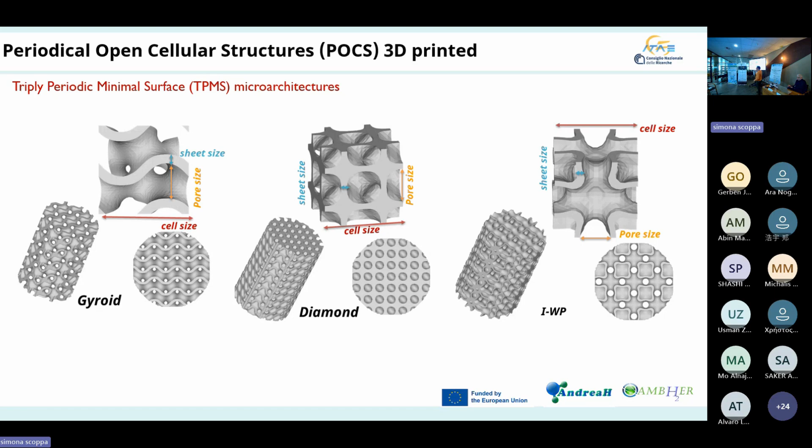Everything can be modified during the design of the structure. In this case, we have a particular type of periodical open cellular structure named triply periodic minimal surface microarchitecture, in different geometries: gyroid, diamond, I-WP. We can plan everything, we can design everything, and at the end we can decide and manage a lot

Everything influences, for example, the pressure drops, and I will show something after. So it's true, we can design everything on paper, on the software.

But then we need to know exactly what we can do with our printer. We know, of course, there are some limitations, physical limitations, dropping of the structure during the printing process, during the powder bed fusion process.

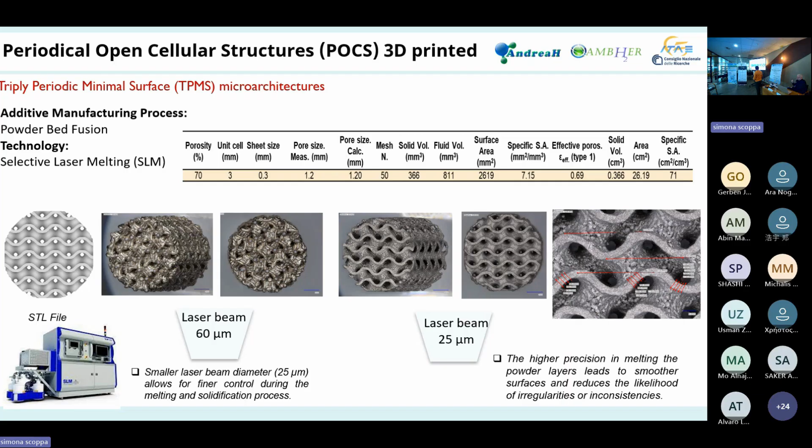In this case we improved everything. And with this we are able to print a gyroid with this characteristic: 0.3 millimeter sheet size, 3 millimeter unit cell, obtaining all the other parameters.

Another thing we can do is a polishing technique we can use. Sandblasting is a technique used in additive manufacturing to completely remove everything and obtain an almost flat surface. But this is not our choice because

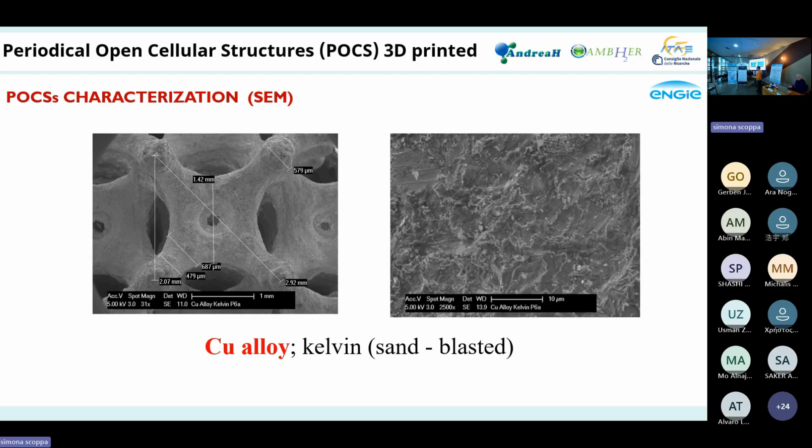So, of course, sandblasting adds cost, an important cost, because manufacturing the structure is already a cost for production. Sandblasting is an operation that adds more cost.

But we can conclude that, for example, for this kind of BCC, it's better to have a structure like this. You can do some sonication to eliminate all the residual particles that are weakly bound, and then you can go with your coating.

Coming back to what I said before, changing the characteristics of the structure also means changing the pressure drops in your reactor. In this case, when you increase the porosity, the specific surface area, your pressure drop decreases.

And so also in this case, we have a thousand possibilities to manage your support.

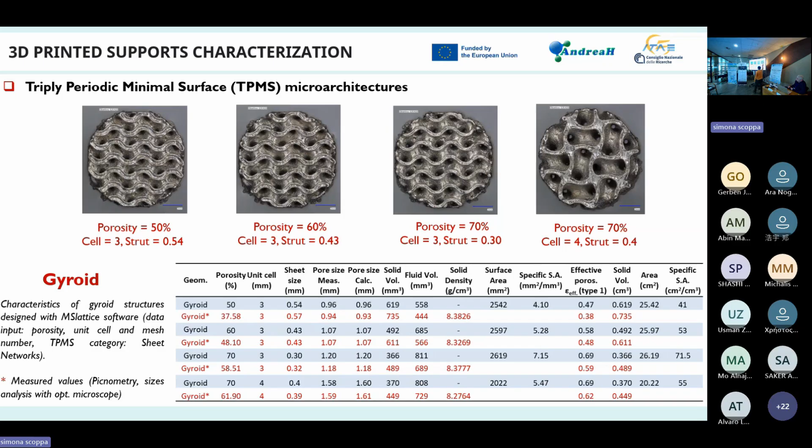And also in this case, we have different gyroids, almost constant, but with different porosity, and of course with different pressure drop increases when you reduce the porosity of your system. Everything can be decided during the design.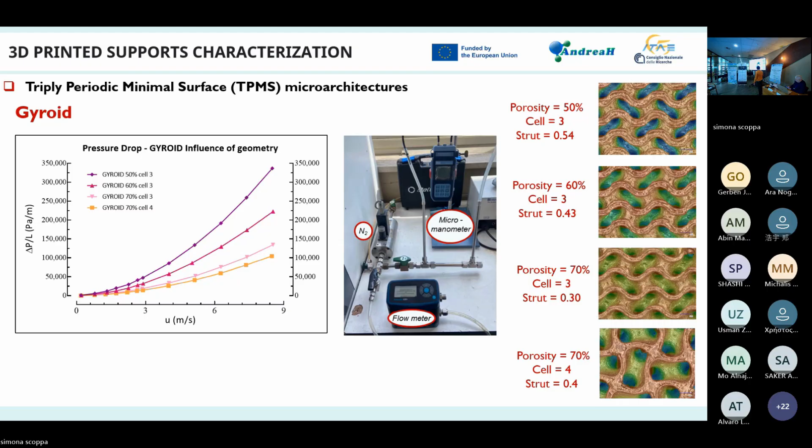Another sample: here we have a comparison between all three different kinds of geometry — BCC, Kelvin, and gyroid. As you can see, BCC is something that reminds you of a monolith, like a monolith. So a very, very, very low pressure.

And inside, we also did, in collaboration with TU/e and ENGIE, some experiments playing with CFD, some model that confirmed good agreement between experimental and theoretical results. Another interesting finding is related to thermal conductivity, on the heat transfer coefficient, at the end of the experiments.

Gyroid seems to have a better situation compared to the other two in terms of balance between pressure drops and heat transfer coefficient.

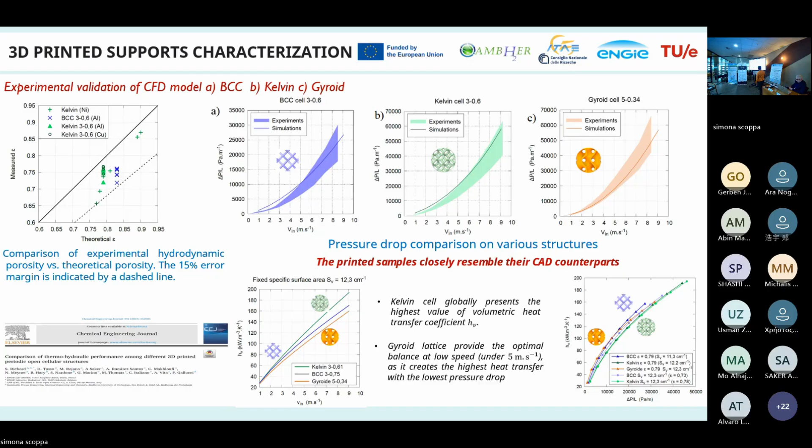Coming back to the coating methodology, we developed a dip/spin coating method. It's not so complicated, it's a very scalable method. We prepare a thermal treatment of our support to generate some oxide on the surface that helps bonding and stability of the catalyst. In parallel, we prepare a slurry with a special composition using a binder, a dispersant like glycerol, water, and a solid amount. Then we do two kinds of operation: dipping and spinning, to remove excess slurry from the support.

We recover the slurry that we get out from the support, and at the final calcination we repeat the process, depending on time, up to 6 times, depending on the amount of catalyst we need to load. More or less this is the maximum value we can reach, about 0.25 grams per cubic centimeter, in order to avoid occlusion or clogging phenomena. After a final calcination, we obtain a stable structure of the catalyst.

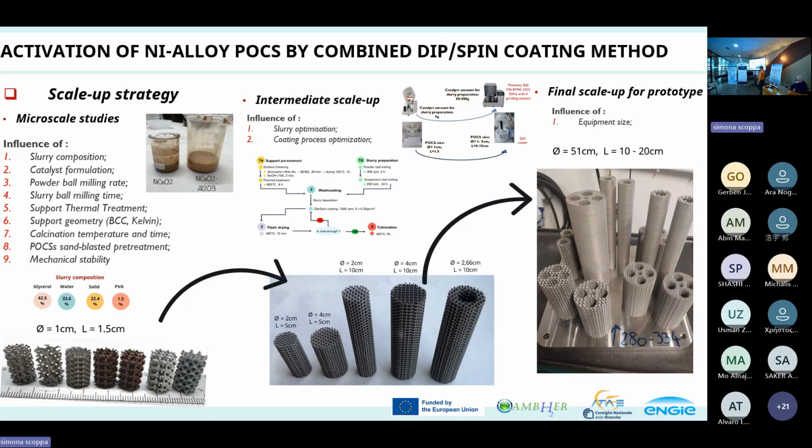What we do in AMBHER, and also in AndreaH, is a scale-up from very little pieces. We start with these pieces, then we had an intermediate scale-up with larger pieces, and then a final scale-up for the demonstration in which we activated the gyroid, the BCC support, ready for integration with the membrane in a membrane reactor.

Some other things about coating and stability of the slurry: initially we had some problems finding the exact composition of the slurry. So it's fundamental, the rheological study, in order to understand the rheology of the slurry, which can change normally from shear thinning behavior to Newtonian behavior.

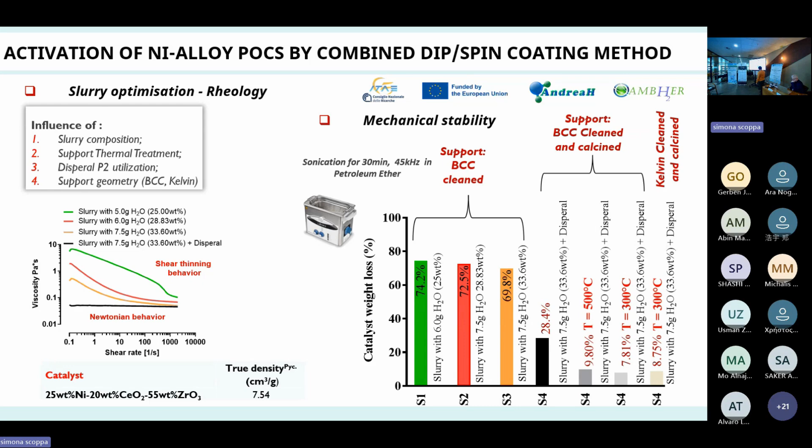Newtonian would be the best solution because it gives a very stable slurry, while total shear thinning can also be used. We tried many different things: effect of Disperal, effect of water, amount of catalyst. At the end, after mechanical stability tests, we found a better solution, and we can say that a loss of material near 10% is acceptable for our structural catalyst.

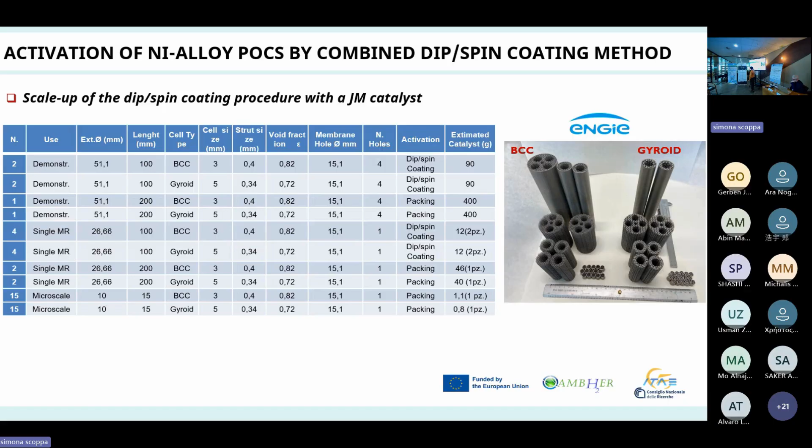So for the scale-up we used similar equipment, just bigger. We designed a holder to host the big pieces or box inside our big spin coater. Here we have different kinds of support with different sizes, at least for demonstration. For demonstration, we activated the support with 5 centimeters diameter, 10 centimeters in length, but also activated support for a single tube membrane reactor needle.

What we did was start from little pieces, and we were lucky in this case. We used the JM catalyst, developmental catalyst for the development inside the project. We were lucky during the scale-up because the rheology didn't change so much when we increased the amount of powder for the activation of bigger pieces. This is the ideal situation, so we used the same composition of slurry for the little pieces as for the bigger pieces.

These are the structural catalysts we obtain at the end. We have images that demonstrate the coating is very good, with a homogeneous distribution, also with a very complex gyroid structure of catalyst inside, and also on the inner wall. The gyroid is the BCC, and the total amount of catalyst we loaded is about 54 grams of catalyst, or 27 grams of catalyst for each piece or box.

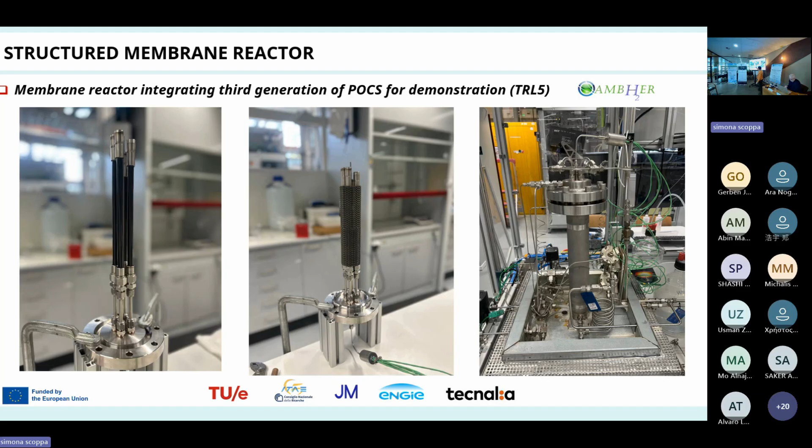We have established a structured catalyst integrated with membrane prepared by Tecnalia, integrated with TU/e, and this is the reactor. The activity testing is in progress, so we have no data yet on this, but basically this is the final configuration for a demonstration, where a gyroid catalyst is integrated with the four membranes. But I can give you some data on the single tube membrane reactor obtained with the second generation of catalyst.

In this case, we have a structured catalyst 10 centimeters long, and if I remember well, 27 millimeters in diameter, integrated with one membrane in a single tube membrane reactor.

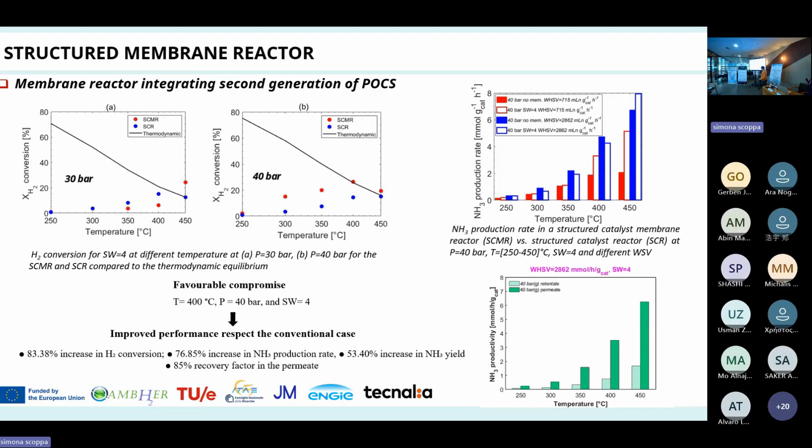Very quickly, some results that demonstrate how the membrane helps to shift the equilibrium, and in some situations this is a favorable compromise. At 400 degrees, 40 bar, with a sweep gas support, we can obtain promising activity for ammonia synthesis.

Very quickly, same things for ammonia decomposition. This is an AndreaH project. Very quickly, because the operation and the activities were very similar.

The only thing is that during the scale-up, we got a problem with the catalyst prepared by Unitor, because the rheology was different. So at an intermediate point, we needed to understand and study the rheology, study the influence of PVA, study the influence of viscera, in order to reproduce a similar situation in the rheology study, and to activate the second generation.

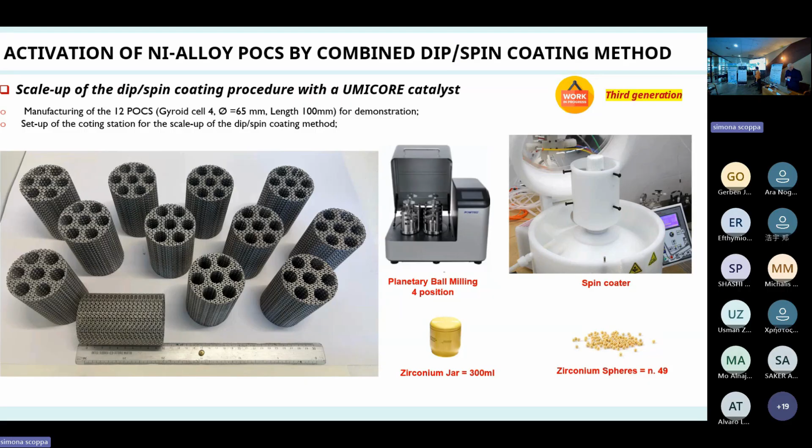With this composition, we obtained very good results for the second generation of catalyst. We are working on the third generation now. This is the work we have to do over the next months, I think, to activate all these catalysts.

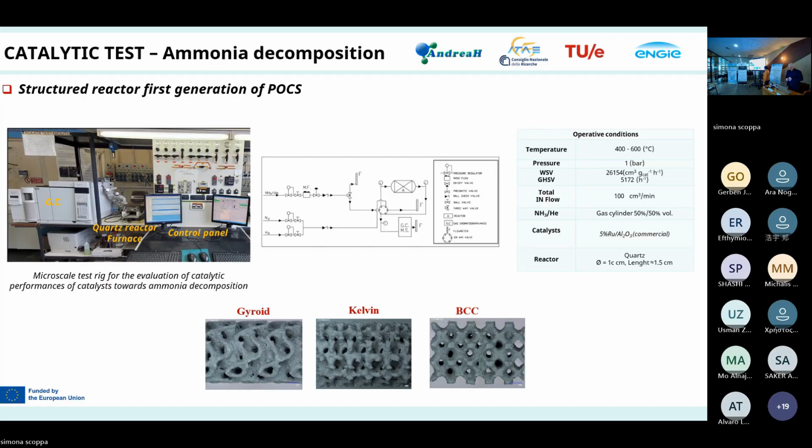About catalytic performance, I can give you some results on little POCS in a microscale test facility. Under these operative conditions, what we obtained is that the gyroid works a little bit better than the others when we go to lower temperature.

This is because the characteristics of the gyroid are a support with high specific surface area, and also has a very good interaction between the gas and the surface of the gyroid. It's a complex, vortical system, so there is more interaction between the gas and the catalyst distributed on the surface.

So at the end, the lesson learned from AMBHER and ANDREAH is that additive manufacturing is a powerful tool to contribute to producing new configurations of catalytic reactors.

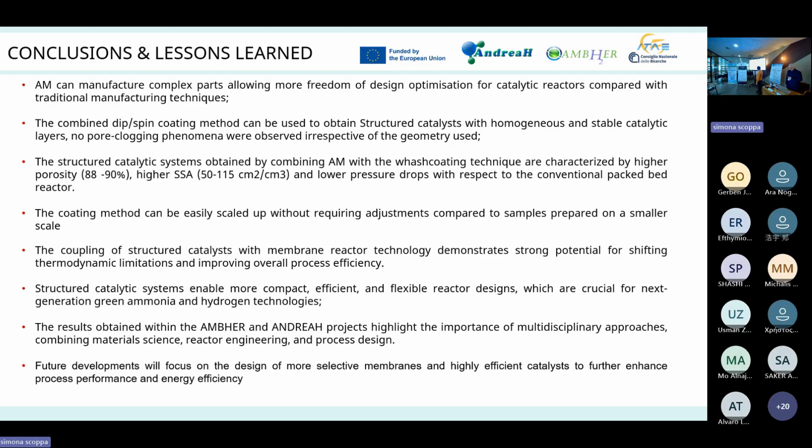The integration with the membrane is something that can work, but it needs to be improved, especially we need to improve the selectivity of the membrane. But in general, there are interesting and promising results, so we should follow this way.

This is the team involved in the activity, and you are welcome to participate in the conference we are organizing in Palermo. Thank you so much.

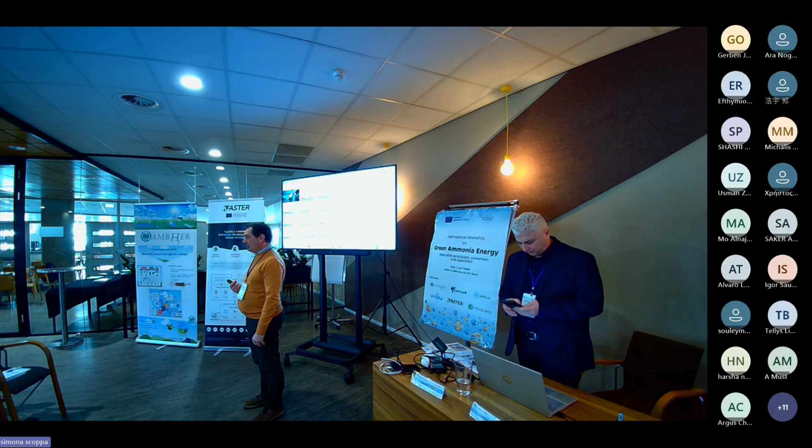The second question I have is, I don't know exactly how you measured it, but we know that the direction of printing, since you're using laser melting powder, creates an anisotropic thermal conductivity, because you have crystals that grow in that direction, layer by layer. This creates an interfacial boundary between one crystal that grew and the next layer you print, so in general you will have a higher thermal conductivity in the direction you print.

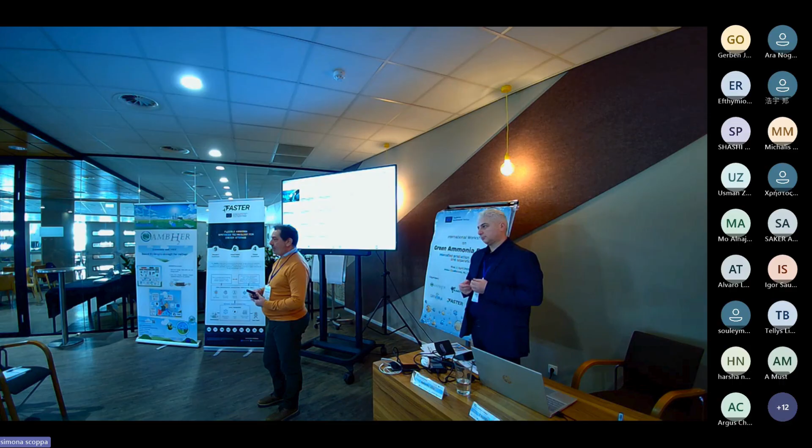I don't know exactly how they are printed, but it seems, based on what you're saying, that it's printed from the bottom to the top. So have you tried to compare the thermal conductivity difference between radial versus axial? We don't consider this thermal conductivity difference on the modeling side, but in the reactor we measured it and didn't see any kind of difference. There is a good axial and radial thermal conductivity.